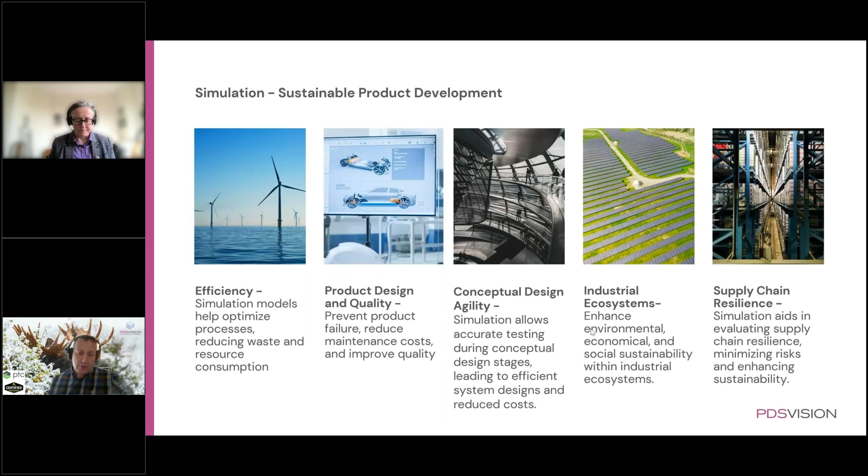For that, one could ask: how do we make decisions on material selection if it has a heavy impact on the overall footprint of our products? From ANSYS' point of view, they made an investigation in the industry stating that roughly 60% of the industry says they have problems finding reliable material property information. If there's a challenge finding proper material data, then there might also be problems or challenges.

How do you integrate that into your engineering data flows? So if finding information is one thing, then the availability of the data, and ensuring it's part of the data streams and the engineering's day-to-day workflows, is also somewhat limited. For that, we propose a few approaches here, and Anne-Laure will go into specifics on user interfaces and how things will look.

I will boil it down, or make a bit of a spoiler at this point, on how we see things. What you can do is take some few baby steps toward the system - take Creo Parametric and ANSYS Granta MI, and you will have the capability of making informed decisions on materials during the selection process.

You will get your hands on CO2 consumption and energy values, and then you can basically limit the users to use only the materials that are preferred for your company. And this Granta MI has nice integrations to Creo Parametric and Workbench.

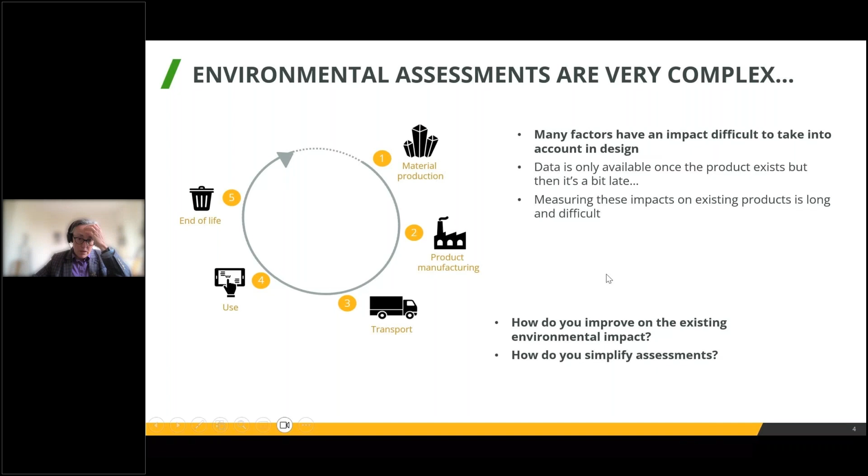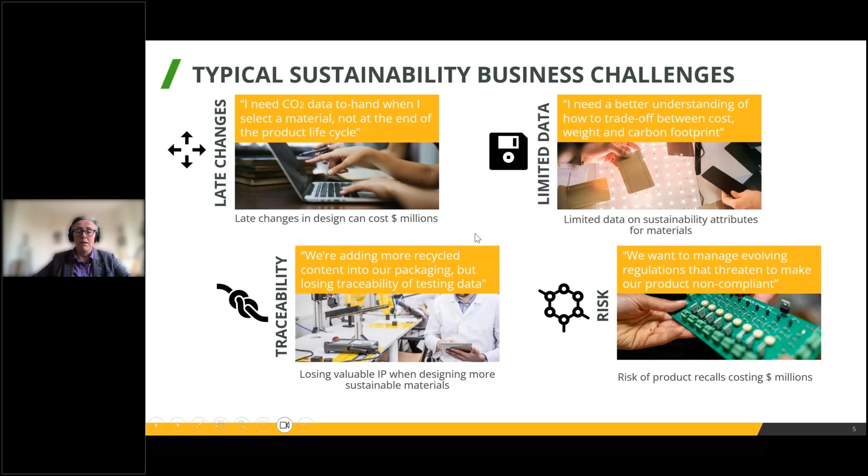So apart from these challenges, what we hear talking to customers every day about these topics on the material front is that engineers do agree that they do not have sustainability data when they make assignments. They really don't know how to make these trade-off decisions. When they are trying to increase the recycled part of their materials, they find it difficult to actually keep track of the information they get on these materials. And all this is also combined with information on compliance and product risks, which we believe can be made more efficient if you make these kinds of decisions at the design level. But if you add an extra level of complexity, it can become a bit too much.

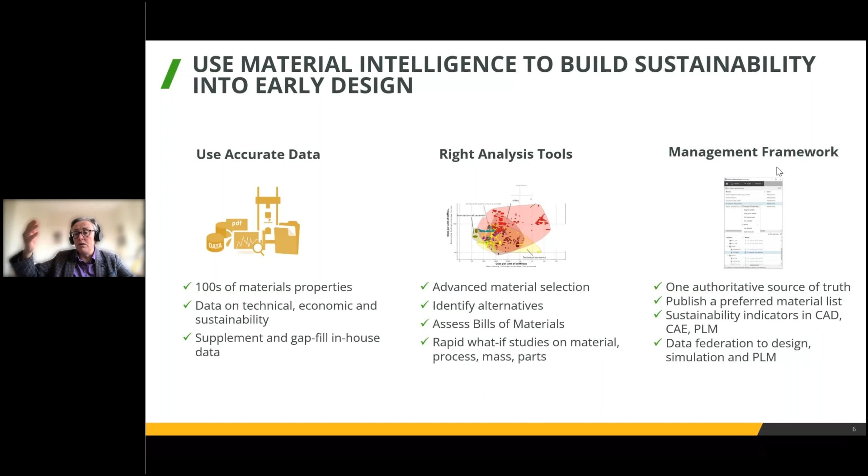So what can we do, and how can we help? We help with data, so we can give you access to information. I'll show you what kind of data we can give you access to, and then we give you some tools to help you make these decisions. Finally, we also give you a kind of framework linked to your existing engineering tools, such as Windchill and Creo, to make sure that these new tools can be easily integrated and used by people, so nobody has to use something new that they don't already use.

And this is why we think that whatever we do on the material front, on sustainability, we cannot help people design better sustainable products without integrating with the existing framework. Before we had that, we would have to spend so much time trying to make sure that everybody was accessing the material libraries we were putting in place. Whereas as soon as you make them integrated in Creo, it's the simplest place to go to find the information, and so people do use it. It makes a huge difference to the acceptance of these solutions to be integrated with existing product management tools.

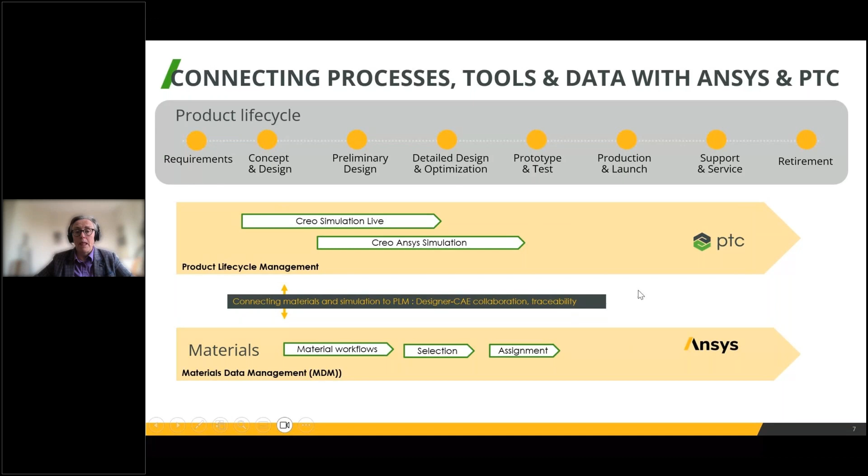So in terms of data, we have three main sources. We've compiled and made available a database built for material selection. In this database, you find about 4,500 materials. For each of these materials, we try to combine information on performance - mechanical, thermal, electrical, whether it's transparent or not, whether you can use it in medical or food applications. So all this kind of information.

To this, we add economic data, so you can have an idea of whether one material is cheaper or more expensive than the other. We've also done a big work of compiling information on sustainability for all of these materials. For all of these materials, you will find the embodied energy and the CO2 footprint, so that you know whether one material is greener than the other. We also have information on how to transform these materials, the main manufacturing processes you're going to use with these materials. And finally, at the end of life, are they recyclable or not, and if recyclable, how much energy to recycle them?

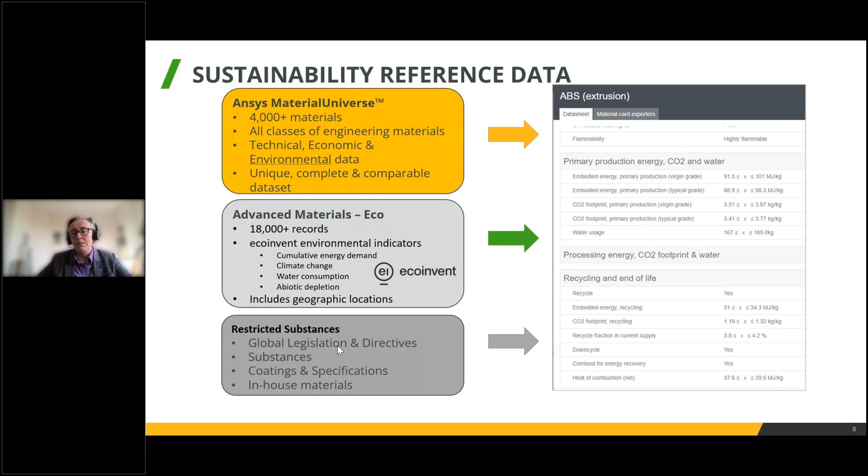So this is very good. We can start with having one place where you can access all your material information. What we find is that normally you will then get some additional information, whether on the technical performance of your materials by doing some testing or having data coming from suppliers, because maybe you work in a different temperature range than what is normally available in this database. So you will be doing some testing to complement that information, but also on sustainability topics directly from your supply chain.

It's normally information that can be difficult to get, but once someone has supplied it, it's very important to capture so you don't need to ask again, and so you can fill your database, have something already pre-filled to start with. Where you have gaps, maybe missing data from a supplier, you fill the gaps with the information we can provide. This allows you to have as good a set of information as you can hope to have.

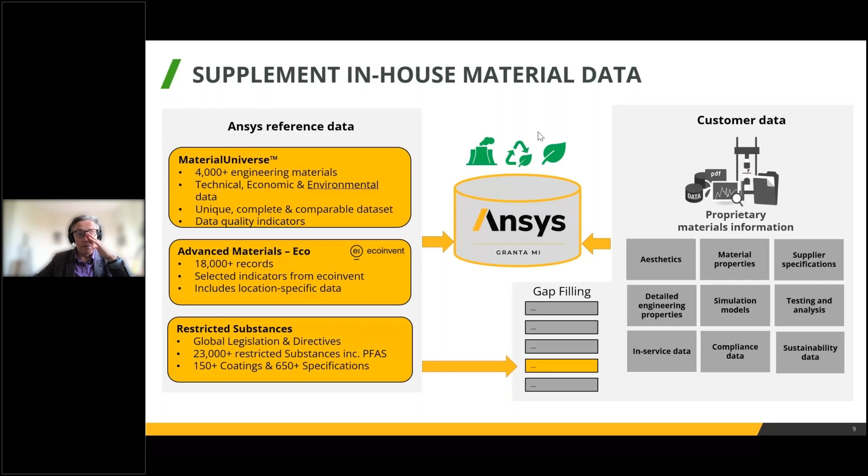And you can rate this information in terms of quality. So you can say, this data I have measured, so it's quality super good. And this data comes from ANSYS, so I add a bigger factor of safety to this because I didn't measure it myself. But at least you have as good data as possible.

Once you have this data, you can make optimization. You can use this information and the CO2 information to make your material choices. In Granta, you will be able to choose materials - I'll show you in the video in a few minutes - on different criteria that you're trying to obtain.

And because you have information on the CO2 footprint, you can add CO2 footprint as a filter. You can say, I want something which is less than a certain value. It could be the value that you find for your existing materials, or you can do these charts, which allow you to look at materials that fit your requirements.

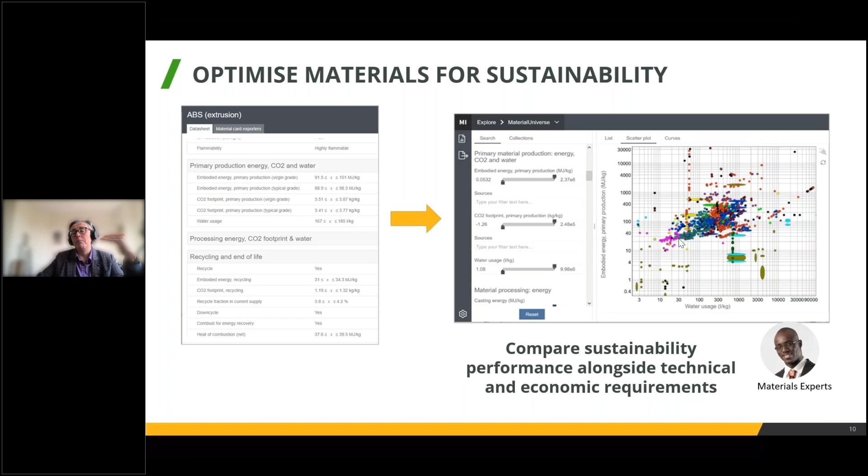The idea behind Granta MI and creating this one source of material truth is that you add all this information. We believe that having sustainability information separate from all your other material data doesn't really work. So we believe in capturing this information alongside all the technical data, some information on price, impact and sustainability data, and the environmental and regulation information as well.

So that people who need to make material choices, maybe product designers, will be able to have all the data they need to make informed decisions. And on the material engineers' level, if it's them who make the decision, they will also be able to optimize the selection. These people who make the data available will also be able to choose which data is visible to the rest of the organization, and ensure that everything is integrated with your CAD and your PLM for traceability.

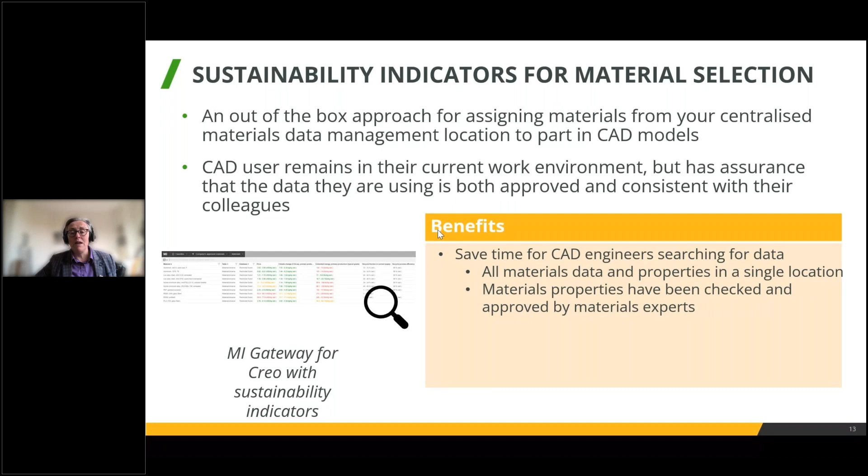So here I'll show again, being able to do it directly from the Creo environment, making the data visible in this environment saves a lot of time for people. They don't need to go out to look for material data. You make sure that they only use the data that is being approved, and you give them sustainability information.

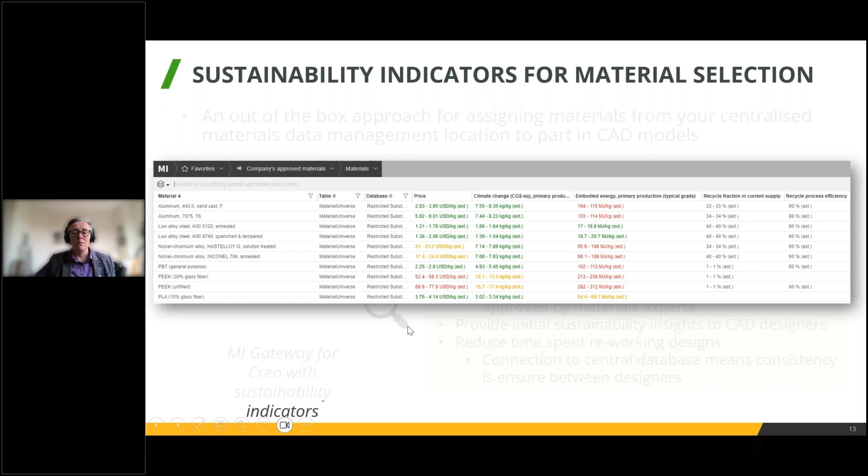I'll show you now a video. This is just a bigger picture of what I was showing before, so you can see a little bit better when you get the video and the presentation after the webinar. So, video - let me make sure that, yep.

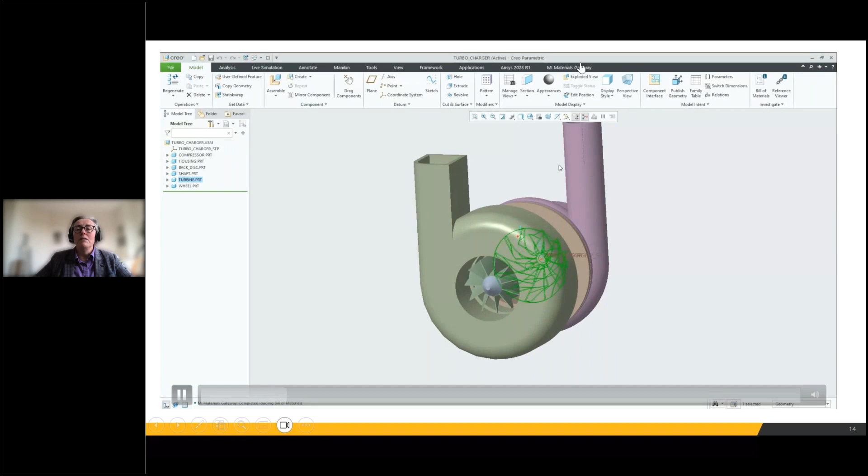So here we are in Creo parametric, and you have an assembly open, and you see that there's this little gateway for materials. In there, you will be able to do a search, either for a material or for maybe a light, strong, and sustainable material. You can just add your criteria for your selection, and you end up with the results.

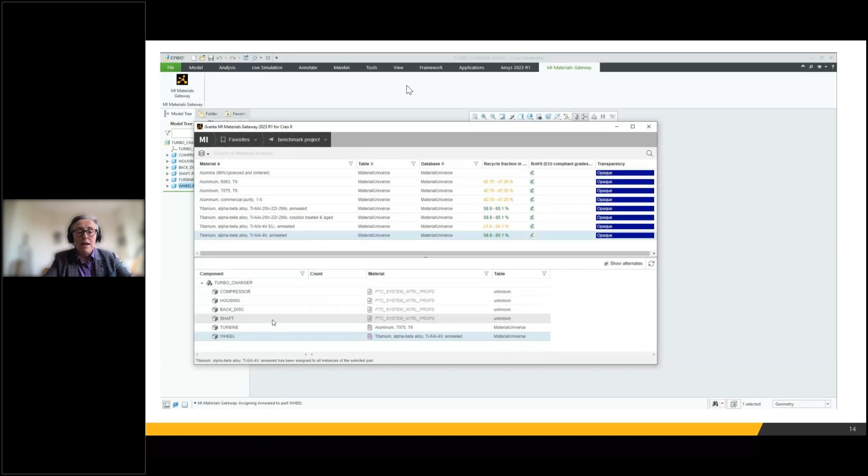If there are some materials you're not familiar with, you can check the data by just double clicking on the data sheet on the line. Then you can assign them to a solution, to a part, or you can also create a favorite list, so that if you end up using mostly the same materials, you have your list of preferred materials.

Once you are back in Creo, you can see all the data has been assigned to your part, and this guarantees the traceability I was talking about. So you know which material exactly has been assigned to each part of your assembly.

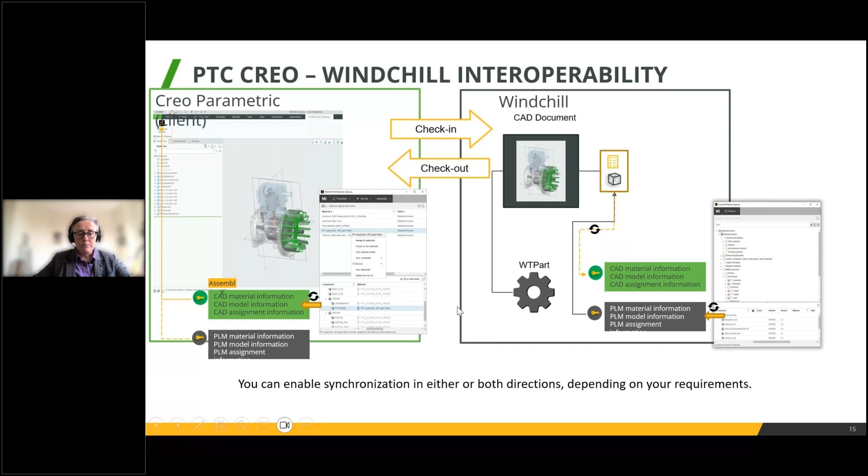Now, once you have assigned all this data to your parts, in the same way that you can do a weight roll up, or a cost roll up if you've got cost information behind all the materials, we think you can do a simple sustainability roll up, at least as far as the material, the processing, and the first manufacturing processes are concerned. So it's the time it spends in your factory, basically, not the overall life cycle.

We don't have that yet, because you don't have at this point any information on how the product is used, nor what happens at the end of life. But at least you can do this first assessment very quickly, and you can do it for different materials, because you have assigned a primary material to a part, but you can also assign an alternative material. So you can do it for your main or for the alternative.

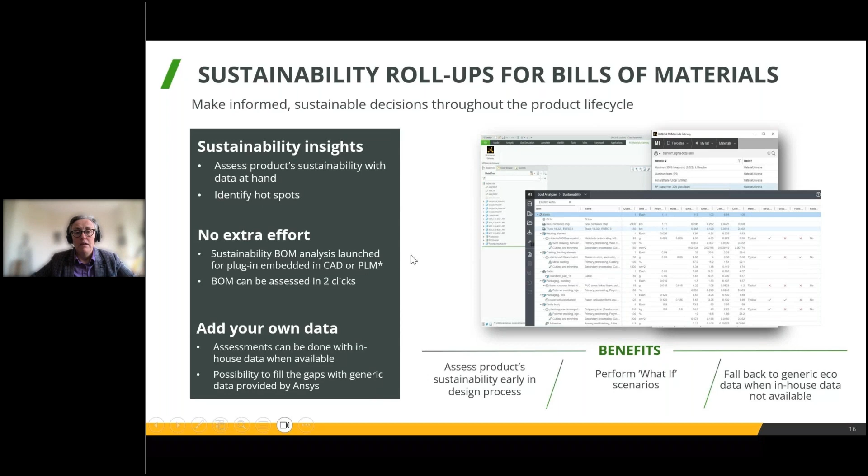So what this will give you is your bill of materials for your assembly. You can add a transport phase, so you can see where it's actually come from. Here we see that we've put it in a container from China, and it's done 2,000 kilometers. This we have to add manually to the bill of material when you do your analysis.

You've also added then a second transport phase, having a truck from the port to your factory.

And then for this heating element, we've said that the nickel, there's been some drawing, and we've added the process, and then there's been some secondary process of trimming and maybe taking out what didn't come clean out of the first process. And the same thing for the cast for the heating element. We've done some casting for that stainless steel, and we've also done some trimming.

So you can add the processes after you've done your automatic bill of materials. It speeds up the process, and you can keep it from one time to the next. And you can add some standard parts in case part of your assembly has some plugs, some wires, some things which are not just materials and which you don't design yourself. So let's have a look at this.

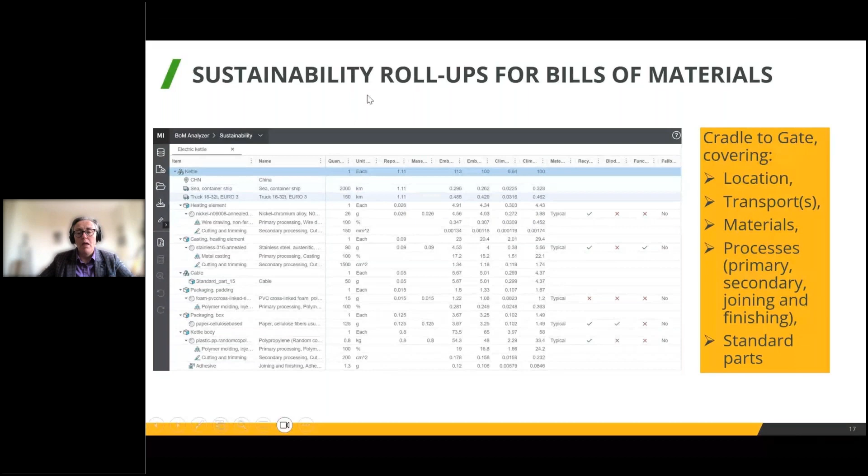So second video, we're again in Creo, and we've got a different assembly. We're going to again open the gateway.

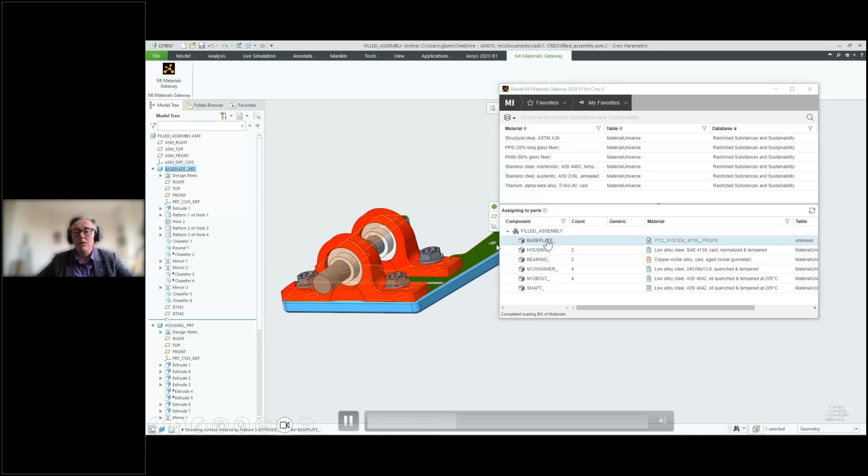And here we see that on this base plate, we don't have any materials assigned. So we're just going to go and assign one from your list of favorites, which is just above, and it's a structural steel. What a surprise. And then we can send it to the BOM analyzer.

So I'll just go back for a second. You send it to the BOM analyzer, and you have two choices: either you do an analysis on the sustainability or on the restricted substance impact. But here we're going to look at sustainability.

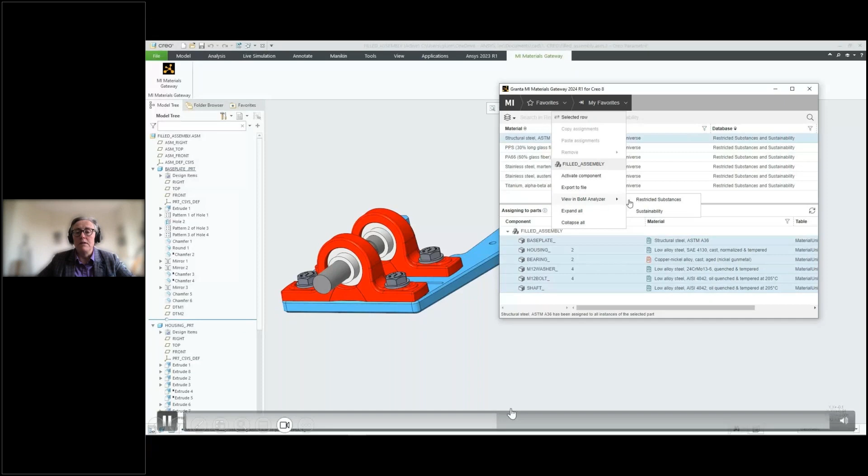So we have our BOM, and we have this little calculator that we can click on. It's doing some analysis, and then we see the results. We see the mass, and we can see what's got the biggest impact. We can see the embodied energy and the climate change equivalent.

And we can see that overall or in percentage. So we can see here that the base plate counts for 54% of the overall impact. So maybe if we want to make a change, looking at changing from our favorite structural steel, or looking for a different manufacturer for this structural steel, that could be a good idea.

We also have information on whether the material is recyclable or not, and what can be happening at the end of life. So very quickly, you can get this data in the same way as you get it for weights.

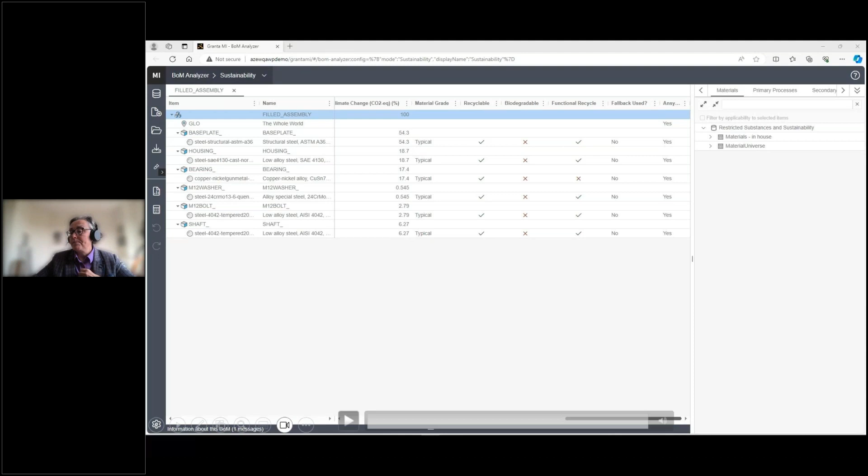And as I showed, this information also can be used for compliance. The idea is early in the design, when you make your choices, you could also check that none of the materials you have assigned have any impact, that they are not banned in any legislation.

This is much easier to check now than to find out once you've finished your design, and will then have to redo some work if you need to change material later on when you find that a material is now banned in certain legislation. And to do this, we have a separate database which you can link to your own data.

From suppliers - so the same benefits of everything you can do earlier in the design. Our main objective is to give as much information to people who make material choices as possible, as early as possible, and do it in a simple way.

Now, when today when you make material choices and do design, you're trying to optimize your performance at an acceptable cost. And what we're saying now is you need to extend this to add sustainability to that balance. I don't know how you draw a balance with three things, so I didn't. But to do this,

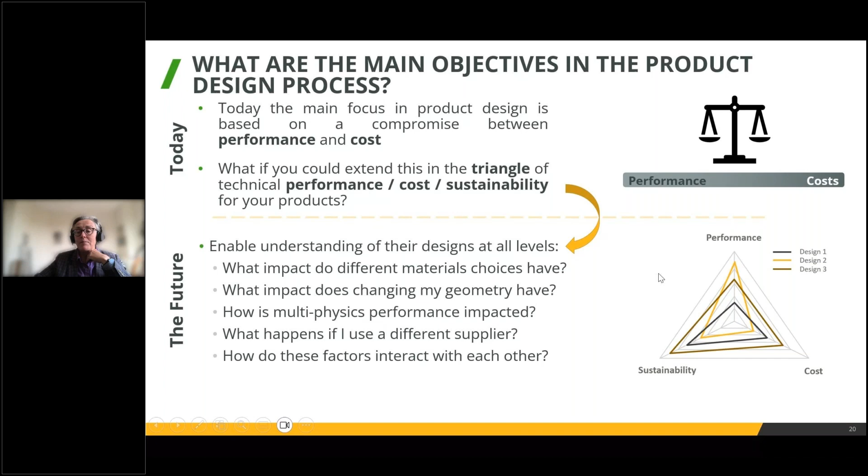And in order to do this, you need a way to link all this material data - to be able to look at the cost, at the environmental footprint like we've seen, but also link it to your design tools and to some simulation packages, so you can validate that your designs will work in the environment they are designed for.

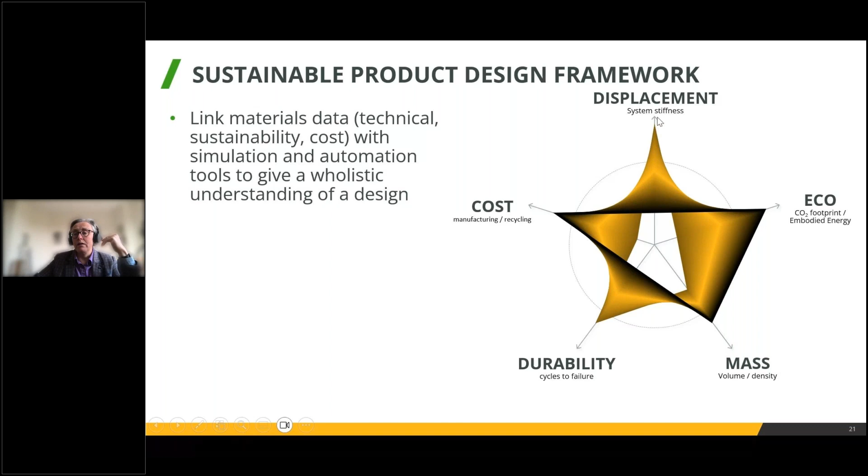And do this not only for one, two, or three designs, but for a multiple of combinations, looking at which ones are the best adapted to your objectives, whether it's to have as performant a design, or to have a sustainable design. The idea is to make sure you have not forgotten anything, and automating it makes it a simpler and more efficient way of working.

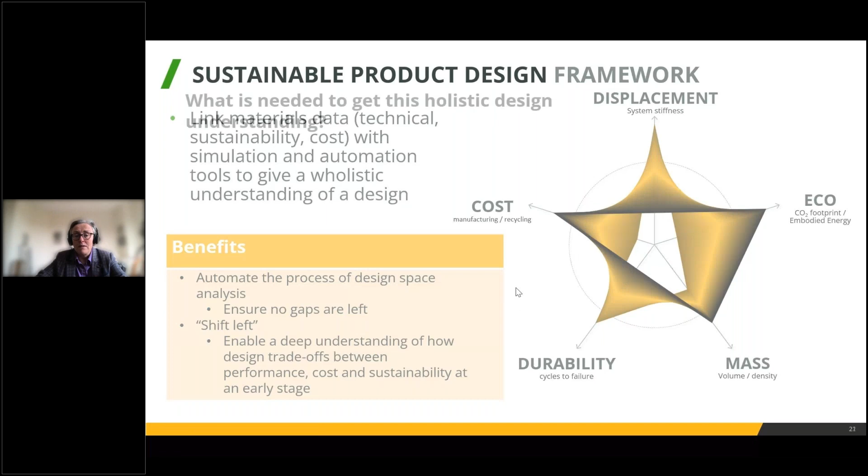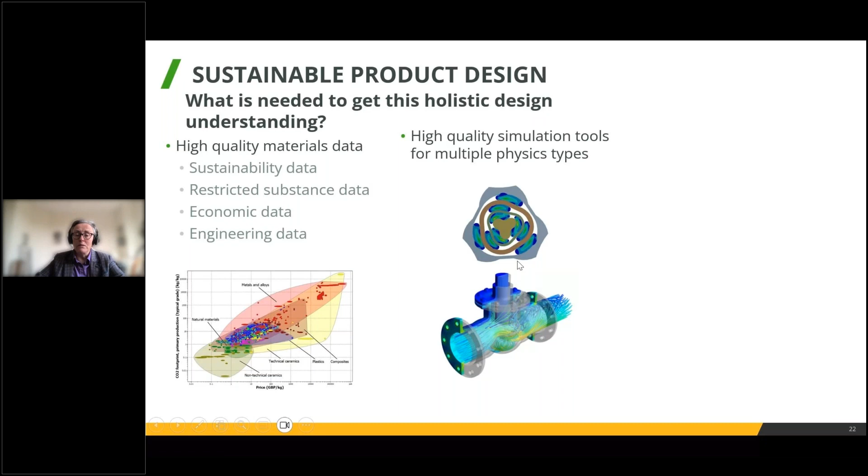And to do this, you would need not only the material information we have looked at, but also some simulation tools, and a glue - a way to do this process optimization. For this, at ANSYS we have simulation and a process optimization tool. So that's what we can provide if you want to go one step further on your sustainability route.

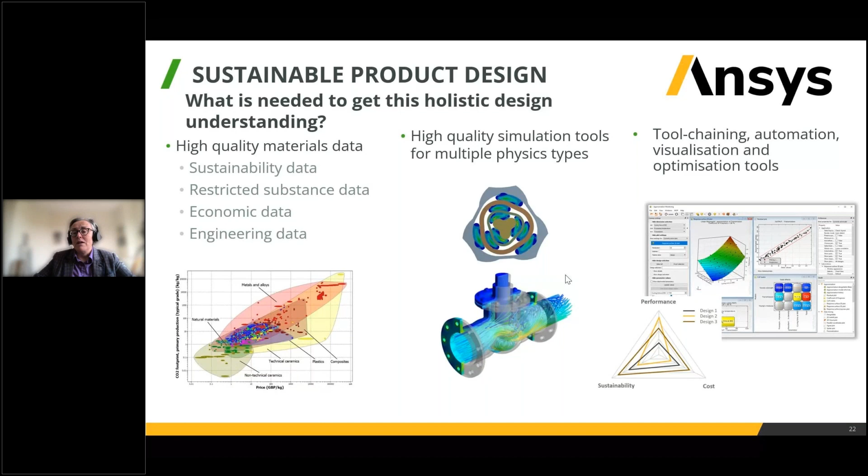So I finished what I wanted to say for today. I hope it's been interesting. I tried to show you what kind of data we can provide in terms of sustainability, how we can help you not only use our own data, but also capture your own information from your supply chain and from your manufacturing processes. Make sure it's integrated with your design tools. Do quick roll-ups once you have all this data in your design. Make sure that you also consider legislative risks at this stage. And finally, do some tool chaining to do some design optimization.